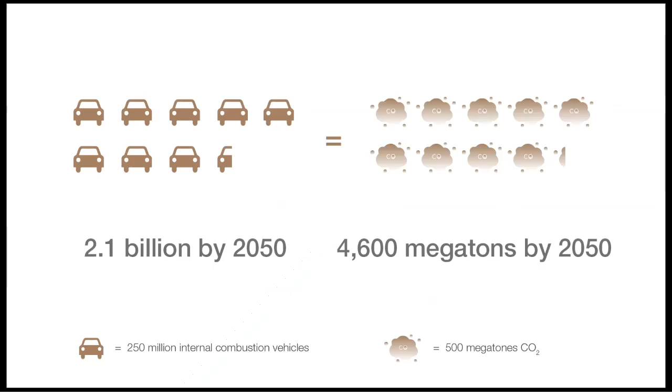If the number of vehicles on the roadways continues to climb at its current rate, it will result in about 2.1 billion internal combustion vehicles on the roads by 2050, which will be emitting 4,600 megatons of CO2 into the atmosphere.

Even if we develop and completely implement autonomous and electric vehicle technology by that same 2050 benchmark and replace every internal combustion vehicle on the road, that will still be producing 1,700 megatons of CO2 into the environment.

The only way to feasibly reduce the CO2 emissions to an acceptable level is to not only embrace autonomous and electric vehicle technology, but to also reduce the volume of traffic on the roads. Changing the way we travel by sharing vehicles through means such as mass transit and normalizing the use of mass transit would reduce 2050 emissions to only 700 megatons.

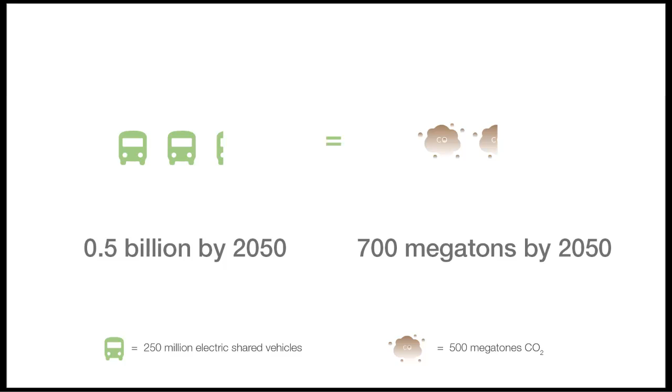Our site is located in Spokane's University District and is an educational destination for many universities across the state. One community that could benefit from efficient and convenient mass transportation are students and faculty. For instance, Washington State's School of Design and Construction was moved from Spokane to Pullman in 2011, inconveniencing students and faculty who had set up their lives in Spokane and now must commute to Pullman.

The challenge of mass transportation is that its current forms are too slow and inconvenient for the general public. For example, a charter bus from Seattle to Spokane would take almost 5.5 hours, and an hour and 40 minutes from Pullman. With the implementation of state-of-the-art high-speed passenger rail technology, and by partnering with Washington State Department of Transportation...

...to co-opt the freight rail lines into passenger rail, the mass transportation trip duration from Pullman could be reduced to a mere 20 minutes, with the added benefit of connecting Cheney to its Eastern Washington University campus in Spokane. However, the trip from Seattle would still take over 2 hours.

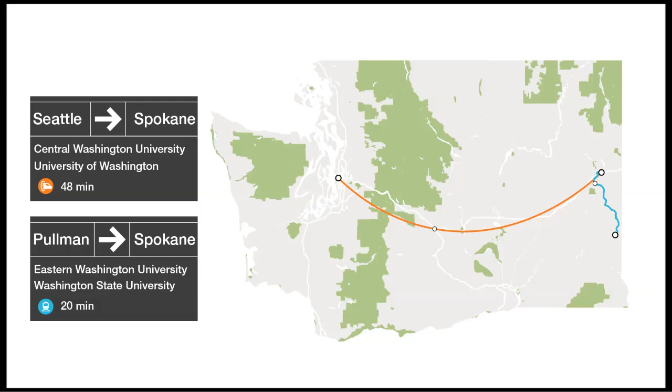While not bad, it could be improved if we look to the future in emerging technologies such as the Hyperloop. Utilizing a Hyperloop system, the trip from Seattle to Spokane could be as brief as 48 minutes. Being able to connect these campuses and communities across the state would reduce the need for single occupancy vehicles through the ease and convenience of mass transit.

Within the city of Spokane, the Transit Authority is expanding their high-performance rapid transit system to pass through our site. This system is similar to a light rail system in Seattle, but an at-grade electric bus system that utilizes dedicated lanes where passengers can prepay and enter and exit at the same time. This connects neighborhoods and districts locally to our site, as well as to Spokane Community College.

So looking at our site, it is a perfect opportunity for a transit-oriented development, as it is the one point where the rail, rapid transit route, and University Gateway Bridge all meet and would allow transfer from one to the other, linking regional to statewide systems.

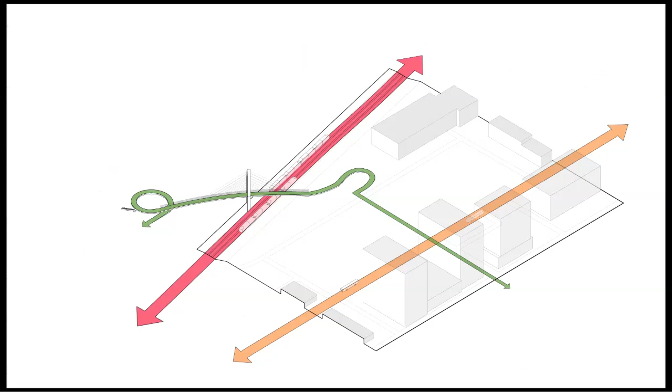The bridge was recently constructed and connects the historically separated North University District to the underserved Sprague area. Introducing the Hyperloop at this connecting point also provides the necessary grade to descend at the needed 8-degree slope to tunnel under the metropolitan area of Spokane.

By extruding these connecting elements, the beginning of the massing is developed. The connecting point of all four methods of transportation flow directly into a 2-story retail concourse space that divides the large block into more pedestrian-friendly spaces.

The residential portion of the building is extruded upwards, but then slopes downwards to not only preserve views of the landmark Gateway Bridge and what it means to the community, but to also ensure the interchange fits within the existing urban fabric. As of right now, the majority of the Sprague area's buildings are only 1 to 2 stories high, until the future proposed Sprague Development Master Plan goes into effect, which would develop much higher buildings that would match the higher portion of the interchange.

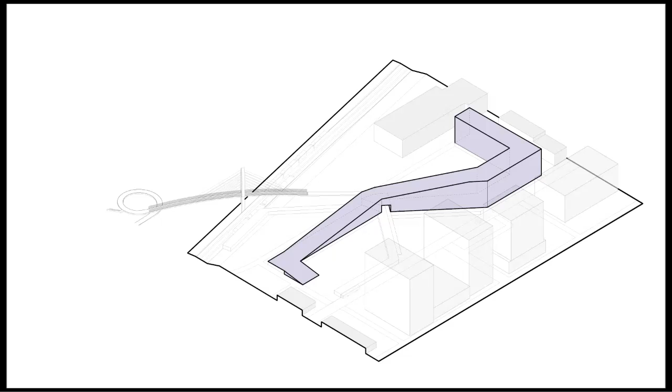While meeting the University District's need for student housing, the interchange additionally increases the residential density within a transit hub, creating a transit-oriented development that provides housing, retail, employment, and mobility options for Spokane.

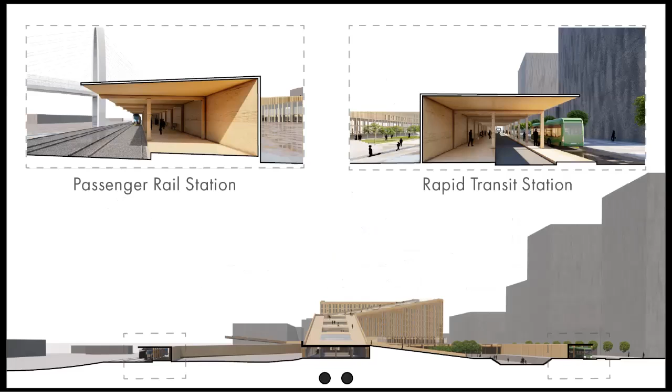These section perspectives are the rapid on and off stations, where pre-ticketing and security have already taken place. The rapid transit does not need to pull off the road into a curb cut, but rather stop and continue on its dedicated lane. Street and on-site parking has been eliminated in order to promote alternative means of transportation to the site, while service can still access the site around the back.

The repeated copy and paste nature of the modular residential units reduces construction cost and reduces build time. The layout maximizes exterior exposure for living or sleeping and living spaces while clustering utilities within and between units.

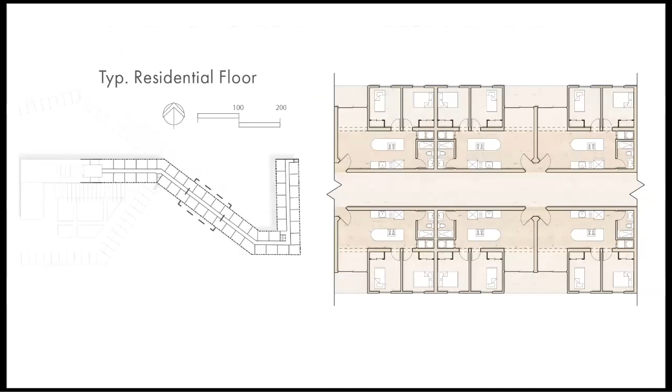The first two retail floors are a reinforced concrete grid with a transfer slab where the load path from the residential mass timber grid above meets the concrete below.

The mass timber structure is made up of CLT floor panels sitting on the structural CLT walls, which allows for the modularity of the units. Where the load path meets the concrete at the transfer slab, additional reinforced beams have been added to assist with that load.

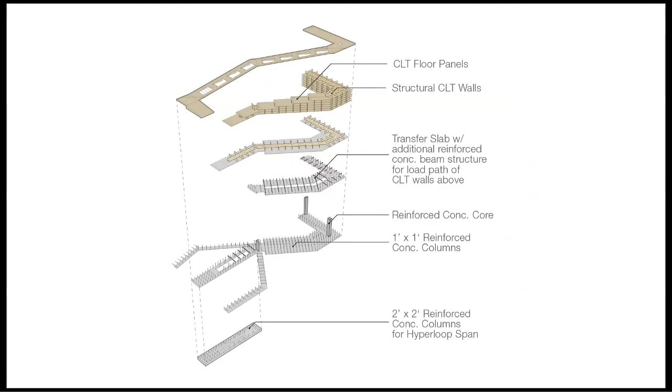So in conclusion, the interchange attempts to promote mass transportation through the integration of residential and transportation infrastructure. In being so transit-oriented, this development can also benefit the community while changing norms and perceptions of the future of our transportation. Thank you for watching my presentation.